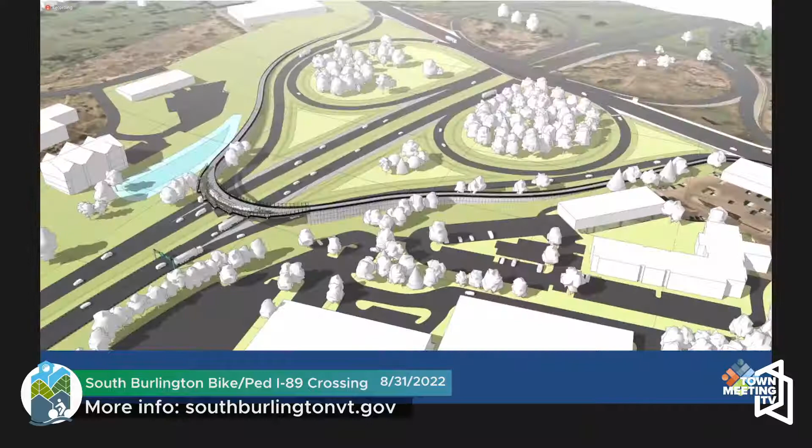On the land bridge, we're looking at what you were saying about wanting something green, something wide, something very natural. Here we focus very much on the user's perspective. That's the main focus: what if we give you a way, a place where you can go through it beautifully with a lot of nature, not just on the pathway, but also on the bridge itself.

So here, what we did was try to give you as wide a space as possible. In the middle, it goes wider, around 35 feet, but then we went even a step further by figuring out what if we create this jagged edge, more like a sawtooth, so in a way you steal even more room. What we came up with is one area for a shared space between pedestrian and bicycle, and another area that's more for respite, with planting and places to sit.

And yeah, so you can see this. Actually, for all of the bridges, let me go back, we want to make sure that even though we focus on one thing, the bridge looks nice both from the people using it and from the highway. We want to make sure they are safe and easy to navigate, meaning for people with mobility issues or other needs, it's gradual enough that you can use it, while also providing places to stop, places of respite.

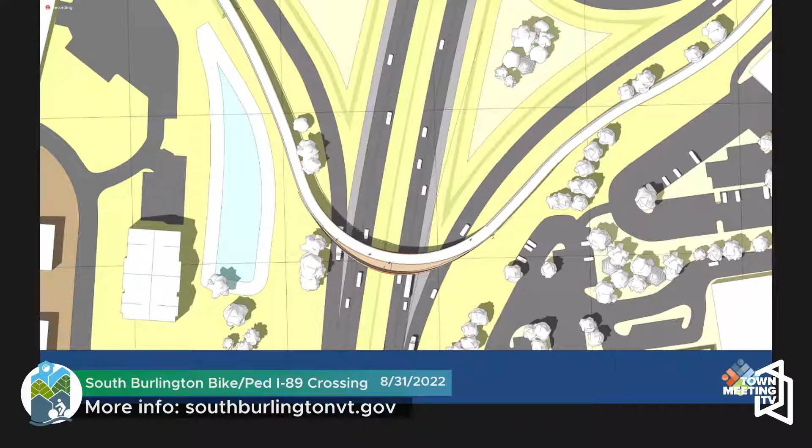And so the last one is the modern bridge. Some people were looking for something like a new thing, and there's this place where there's a university, there's science, something that is cutting edge. So we did this, a little bit similar to the land bridge, but instead of being transparent, we start to play with the idea of enclosure. What if you turn your back to the highway and create this cocoon, so when you're going through it, you feel like you're inside something, really protected. We're not married to the orange, though I like the orange. What we want here is to create more like a sculpture.

One of the other ideas is to take the mountains in Vermont, and that's what we have — a whole sculpture with a splash of color. So when you imagine going through the highway where everything has a lot of monotony, you suddenly get jolted by this form that crosses the highway, the horizon, with a splash of color. I think that will create a statement where it marks the entrance to South Burlington. So that's where we truly push that idea.

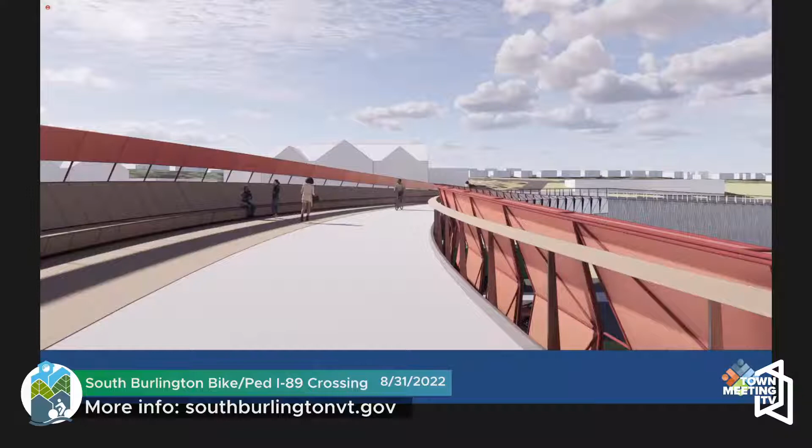What if we do a statement kind of bridge? Here again we make it wider, not as wide as the land bridge. We have the pathways — basically not separated, but they can change material and color. So on one side you have an area where you can sit and have a respite, and on the other side, with another color, you have the shared space for both pedestrian and bicycle. We also play around with the folds, because everything on the other ones was very open and transparent. This one we went the opposite way, very much enclosed, but then we start to think about different openings and patterns. So you see the whole bridge more like an object instead of in pieces. That's a way for us to really take ideas and bring them to the end, really push the boundaries.

And this is the last one, which is the modern bridge. Now, I personally like all of them, so I'm happy that I'm going to get opinions from everybody and I don't have to choose — that's a good thing. So here, when you're going through the highway, you get to see this thing, and I hope we are going to have a color for this.

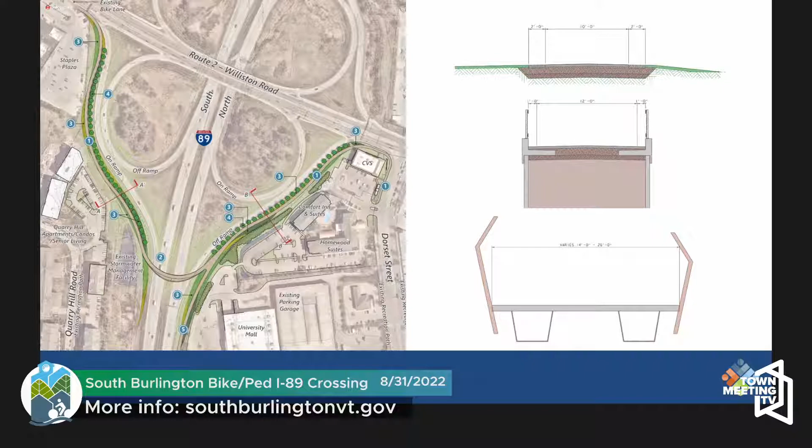I'd love to hear from the architectural team about winter, and which of the concepts - perhaps all of them - what can we do to make it as inviting for people to cross in the winter when it's very cold and windy? Yeah, that's a great question. The question is about wintertime and maintenance, and how are we ensuring that the bridge is also welcoming for use in the wintertime. This is also partially a question for Tom, as the head of Public Works.

Our team has been in discussion with the Public Works Department about ongoing maintenance needs for the bridge. Part of the discussion is that without knowing the bridge that's going to be designed and constructed yet, it's hard to put together the entire maintenance plan. So some of it is going to be working with our team on what that maintenance plan looks like and what the requirements will be for clearing snow and expectations. This will all be recorded in a plan by the city, but some of it is still to be developed.

I actually meant that from an architectural, conceptual perspective - which concept presents the most warmth and literally a wind break from the designs, not just the landscape. Yeah, Eddie, do you want to talk about that? As Eddie's walking up here, I would also say that would be a great comment to write down if that's something important, and stick it on the boards.

Great question - what do we do during the wintertime from the architectural perspective? The answer is something that we will work on, all three concepts, and we will be very conscious about making sure this is usable year round. At this point, the three concepts we have is just the big picture. Then things like security, accessibility, places to sit, what kind of area to sit, and how we can make this year round - that will be a guiding factor we will deal with and solve no matter which one we choose. So I hope that answered the question.

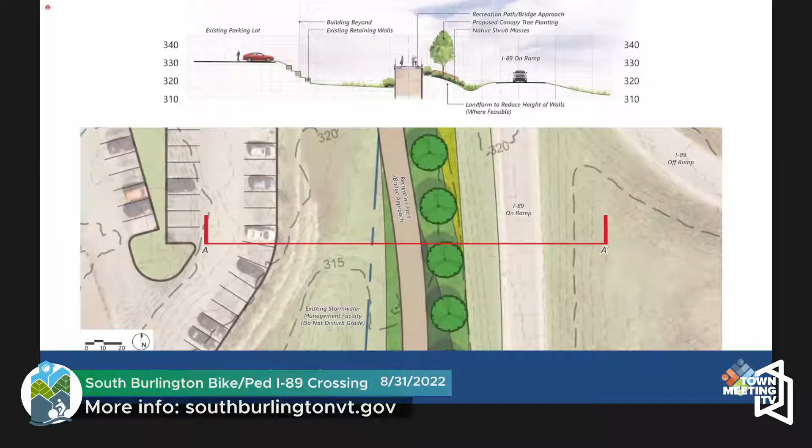Okay, let's move forward here. Mike and Mark were explaining the landscape architecture. This is the western pathway approach, and here's a zoomed in version of this section where we've got the Quarry Hill parking lot on the left. There's a space in between. This is all existing.

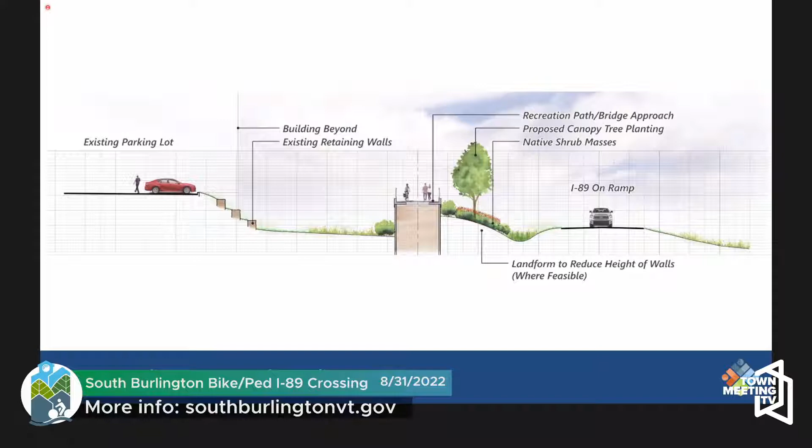The raised portion of the pathway, and then as we look further to the right, we have the I-89 on-ramp. So this landform is what Mike and Mark were talking about, as it starts to hide portions of that vertical retaining wall. Similar section on the eastern side, we've got the parking lot for Comfort Inn and Homewood Suites, the approach pathway, and then the interstate ramps. Again, a zoomed in version of the section—you can see the raised pathway, and again the landforms on either side to hide some of that vertical wall.

So I'm going to ask Tyler Vendatuli to come up. Tyler is a local artist who is also working with our team, and Tyler's got some hands-on art to share. I just want to emphasize a couple points about the art. We're looking at the art from two perspectives: one is the project itself as a piece of art—so the bridge, right? Maybe the modern bridge, as Eddie was talking about, could be an example of the bridge being a piece of art itself. The other perspective is art installations as part of the project. Both of those are elements we're looking at as a team, and we'd like to achieve both of them. So I'm going to hand it off to Tyler.

Can I stand over there? Yeah, great. Hi, I'm Tyler.

Tonight I brought these—I call them chunks. They're meant as a chunk of the larger piece of the project, and they're meant more to make you imagine things than to be examples for any particular bridge. I've actually got pictures of them too. So there are opportunities in the bridge to have cutaway panels. These could go between the members of the bridge so that as you're moving along the bike path, you get the projections of the leaves on it. And as you drive along the highway, you see this dappled surface instead of just plain sheets or a regular pattern. So there are opportunities for paneling.

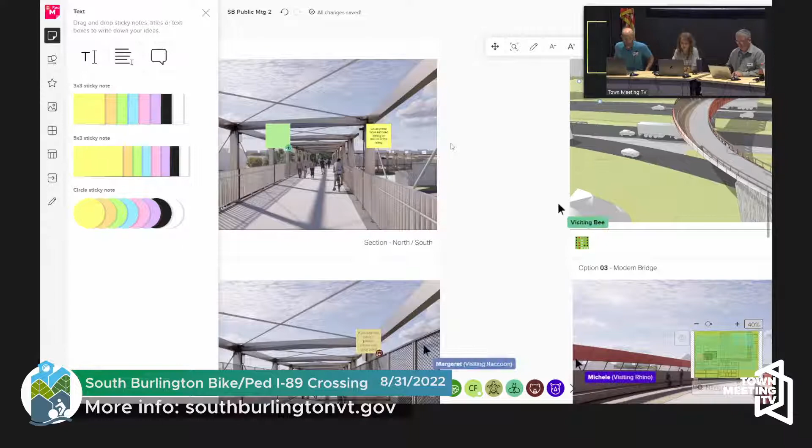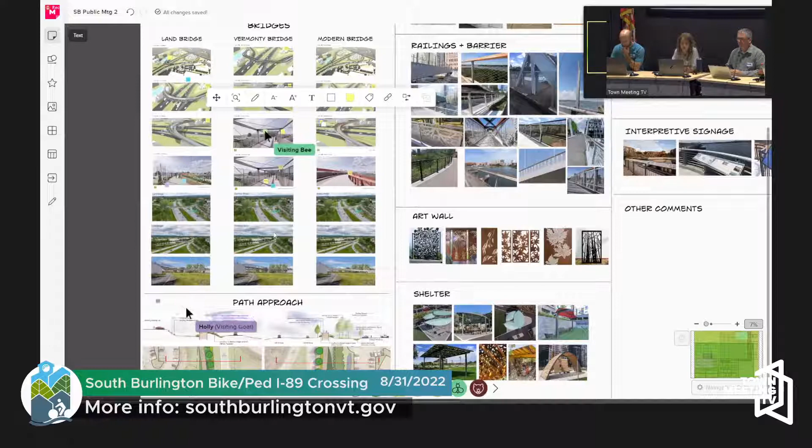It could be on a picture of the bridge or a picture of some of the art or some of the example walls. This is really your opportunity to share your thoughts, pros and cons about different concepts. So if anybody has any questions or just doesn't feel comfortable using the mural, feel free to also just unmute yourself and make that comment as well, and Sierra and Wayne and I will help place that comment on the board. This is also just a pure platform for open discussion about this, and feel free to ask questions. It doesn't have to be just writing down comments or telling us comments. Feel free to ask whatever, participate in discussion back and forth. Any feedback here is welcome.

I'm going to keep this mostly zoomed out, but if anybody has a topic they want to talk about, we'll be able to zoom in so everybody can see on the screen as well. So just let us know what you'd like to see, or feel free to just add your Post-it notes.

You can always guide some discussion. And just to let everyone know, I shared it in the chat, but you do have the ability to use the raise hand feature. It's hidden under the reactions button inside Zoom, but feel free to raise your hand. We can take you off mute. You can ask a question, share a comment, or anything like that.

I'm seeing a lot of Post-its get added, so this is great. Oh yeah, good idea.

All right, I see we have a hand up. So, yep, Chris, please go ahead and share your comment or question.

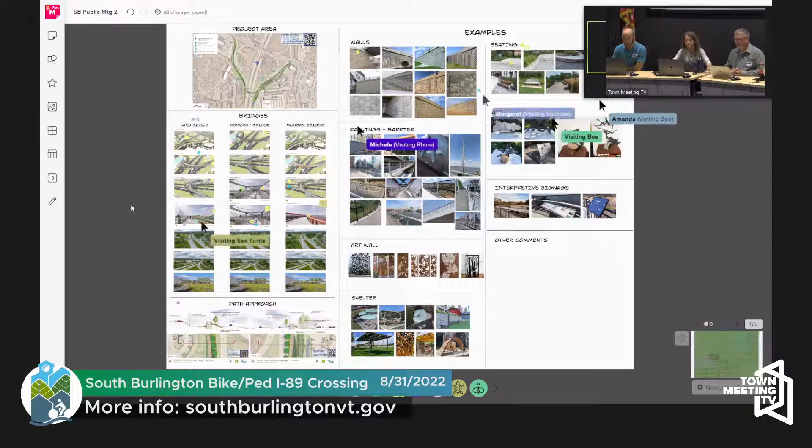Thanks. Yeah, on the land bridge, I was listening on a phone when it was shown originally, so is that—I see there's a person walking kind of on the right, and I see people sitting on a bench on the left. Was there one part that was for cycling, one for walking, or is it like one way direction, or how does that work? I think the intent there is to separate the folks that are using the bridge to just get across, like the bikes and the pedestrians using the crossing, and to create a divide using plantings and seats to allow people a space to kind of maybe go slower or to sit on the benches and be out of the pedestrian and vehicle traffic. They're not necessarily two lanes that are one way. It's kind of a different purpose.

Okay, thanks. Just in the image of the people sitting on the bench, there's a person walking on that right-hand side, so I'm envisioning that's probably cyclists or something like that, and not pedestrians on that side. I think it's just coincidental in terms of the way the people are shown utilizing the bridge. Okay, cool. Thank you.

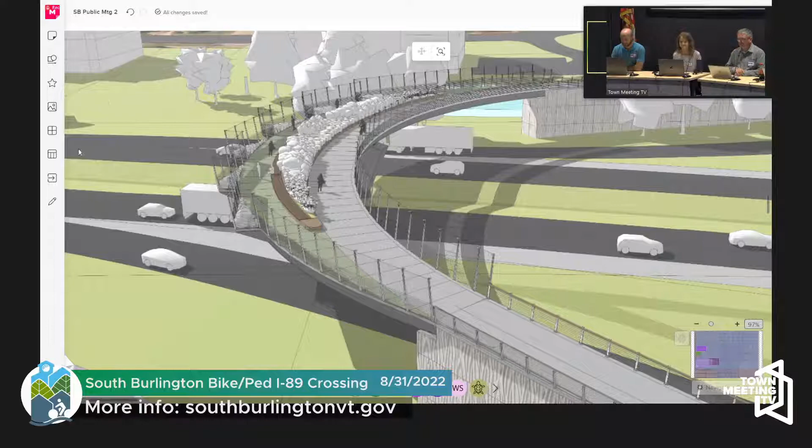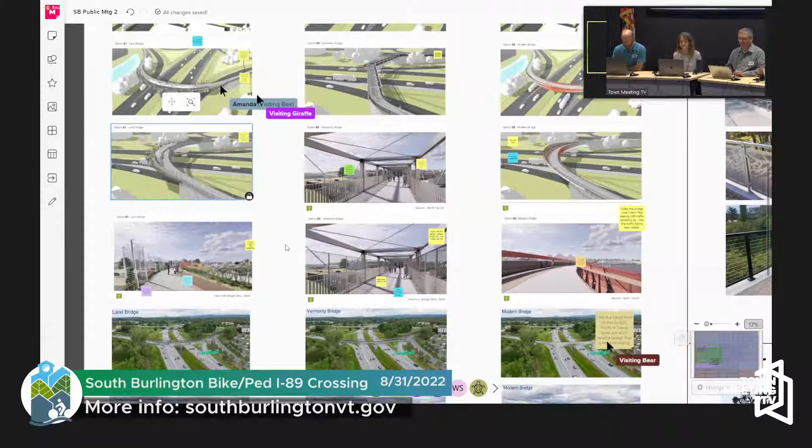All right, Chris broke the ice. There's got to be more questions in the crowd. Thank you, Chris. And we certainly, if anybody has any comments that they want to share with others, certainly we appreciate all the sticky notes, and those were definitely recorded and will be used. But if anybody wants to share any, we can certainly take those.

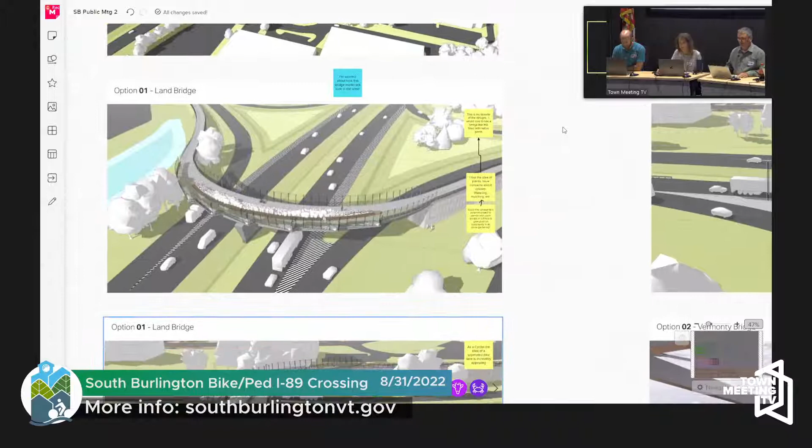All right, we got another hand raised. Is it Avila? Yes, it's Havila. Thank you. Great, you're welcome.

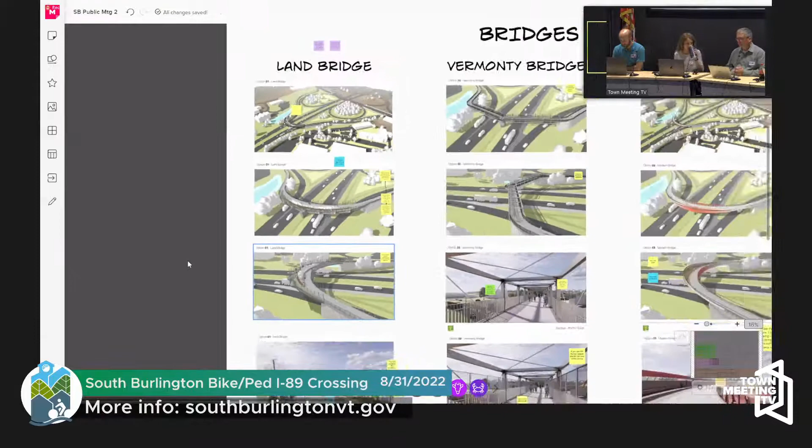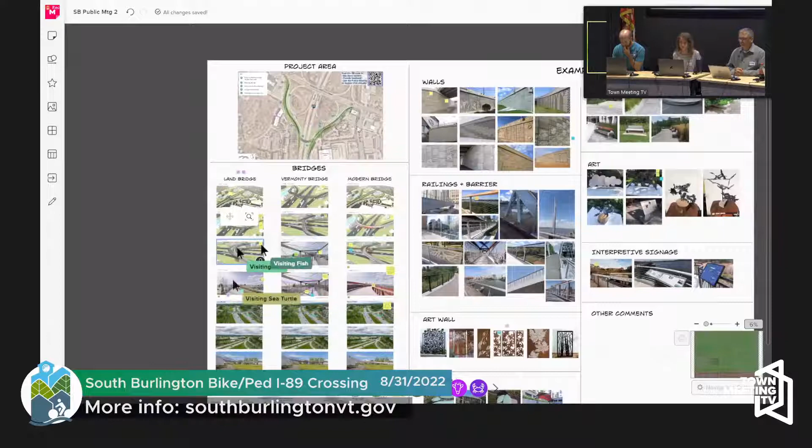I guess I am the current chair of the Bike Ped Committee. I don't speak on behalf of the committee, but I will say that we frequently entertain complaints from pedestrians about bikes whizzing by, and especially on Market Street, which is a shared use path. The markings are not clear that it is shared use, and the pedestrians are really annoyed when the bikes whiz by them. Even though it's a pretty wide space, what we've found that is really necessary is some kind of demarcation on the surface.

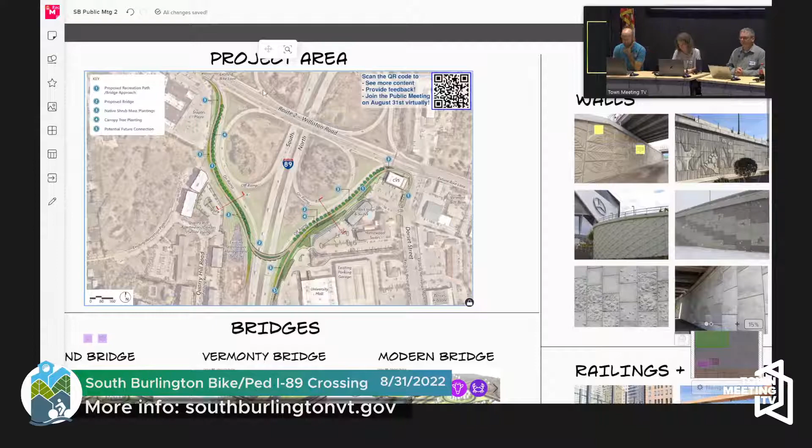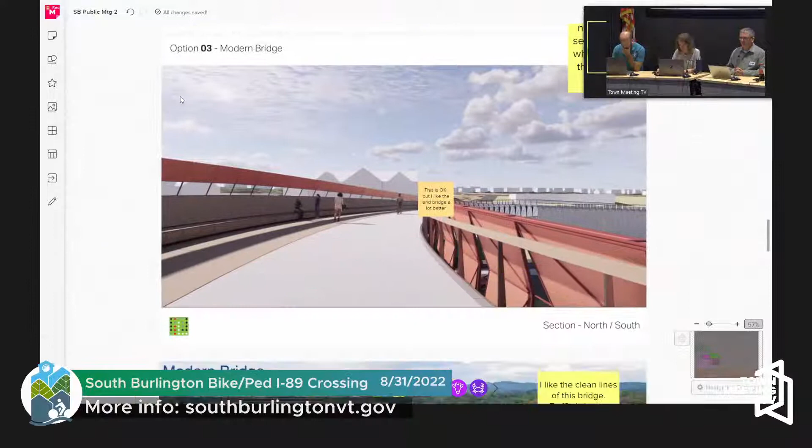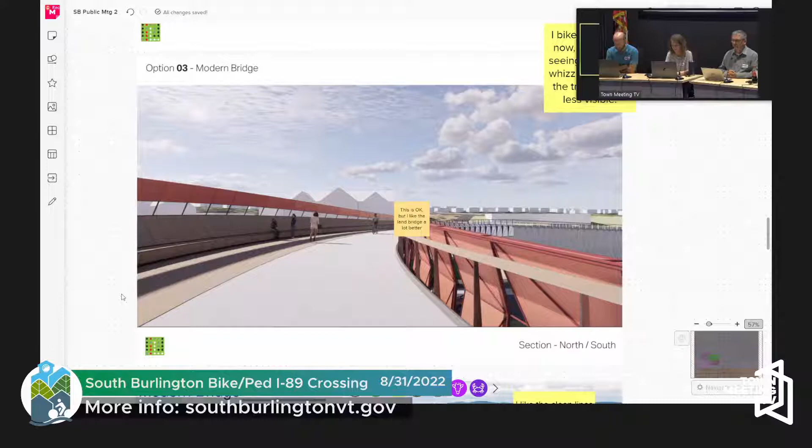I love the idea of having the different kind of color coding. Listening to the presentation, it sounded like it was color coded for people that were more in an area of respite, maybe sitting or standing and looking, versus people actively using the path. I'd really advocate for 3 zones: a bike zone, a pedestrian zone, and a respite zone, depending on the final concept. We entertain complaints from the public all the time, so I'd prefer that and would make that comment. It doesn't matter which bridge concept you end on, that would be a key feature in my mind.

Yeah, it sounds like an applicable concept to all 3 of these themes - the more or different visibility separation for those 3 different user groups.

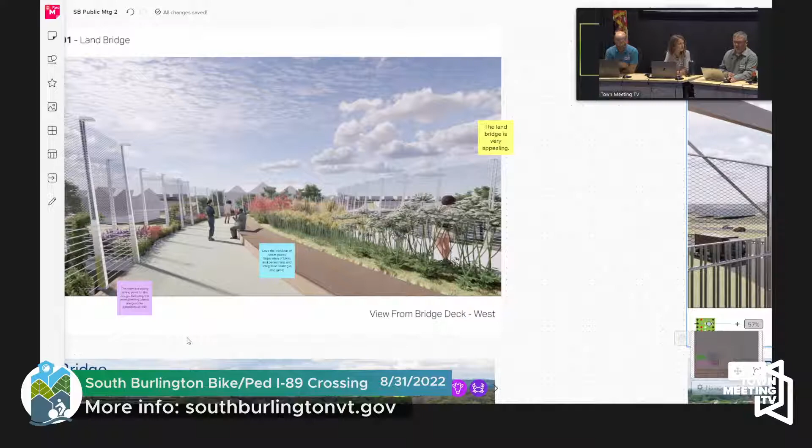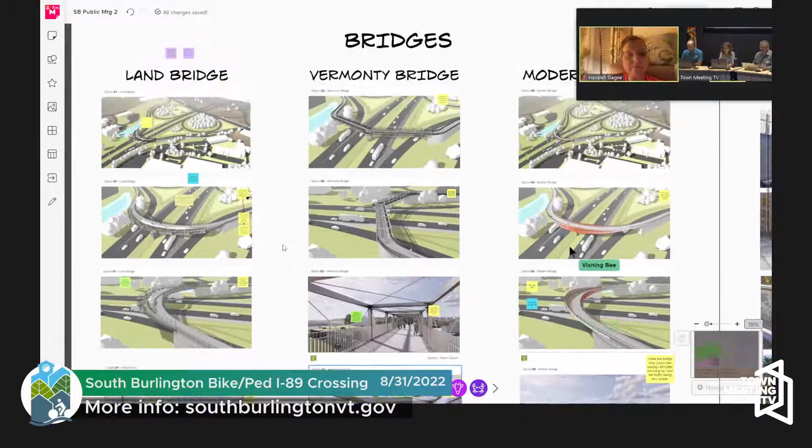Great, thank you. I did have a question to follow up on that comment. Do you think the geometry of any of the options, not just the width, could also address that? Is your experience that these complaints come from areas that are really straight, where a bicyclist can get a lot of speed? I'm wondering if there's anything in the different options that could address that concern a little better.

I can't think of a structural thing, but I love structural solutions. I think in my mind it's demarcation - either color or subtle texture differences that can actually help. Texture differences will help you slow down because it's less pleasant to walk or bike on, but they have to be subtle, because there's a point where it's not really fun to walk on it either. That might be one way to consider it if you're not color coding.

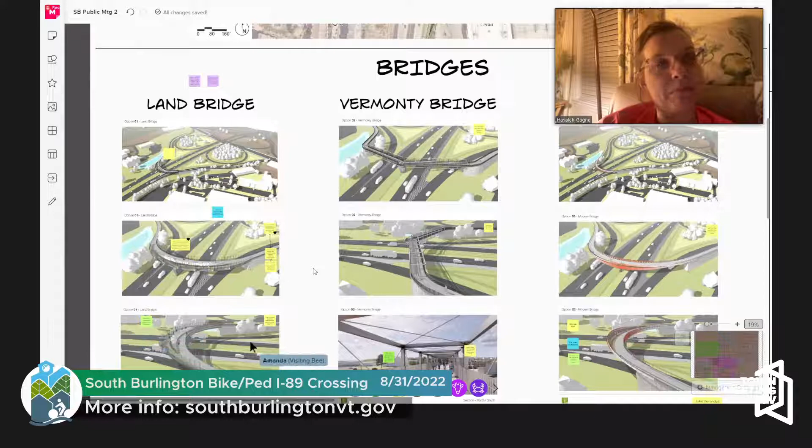I have to think about that, but were you thinking of some other version of it? I was just thinking along the lines of what was discussed about the approaches being sinuous and having some vertical elevation - whether you think that will be a natural traffic calming for speeds or not. I'm curious where your complaints are coming from in the past - are you seeing any common traits in the areas where you're having those conflicts?

I have a feeling it might not matter, only because e-bikes and motorized scooters are being used more and more, and elevation isn't much of an issue when you ride a pedal assist e-bike. You can whiz up a hill easily at 20 miles an hour if you're not thoughtful about how you're sharing the path. That's part of it - you want people to commute and use a pedal assist e-bike. It's a great commuting bike, but people have to be considerate, and you have to share and structure things so everyone has their place, which helps people share.

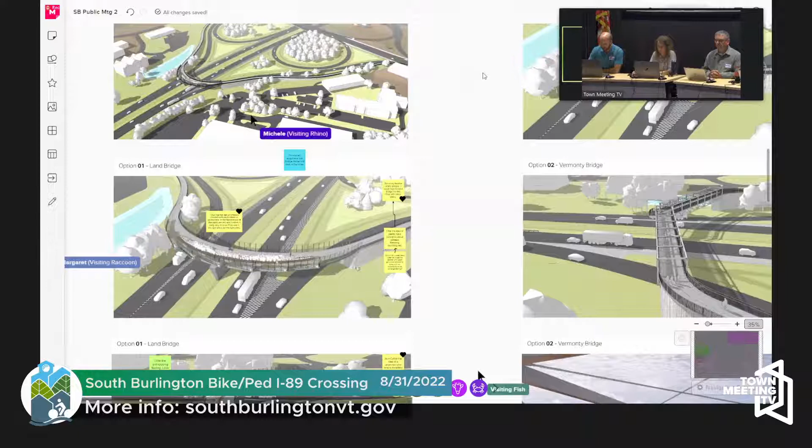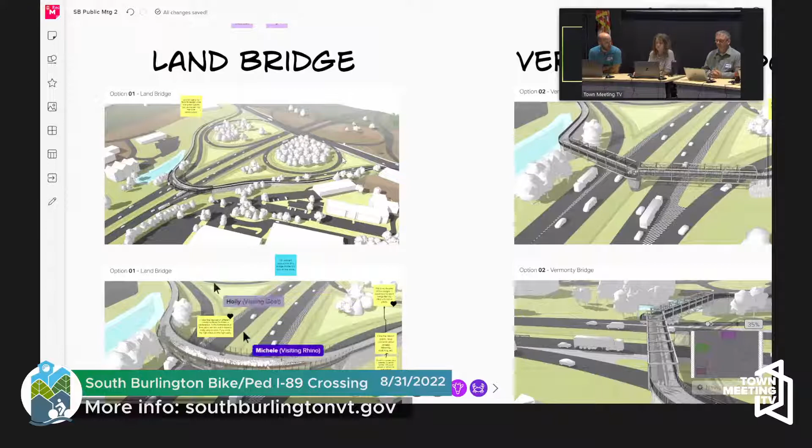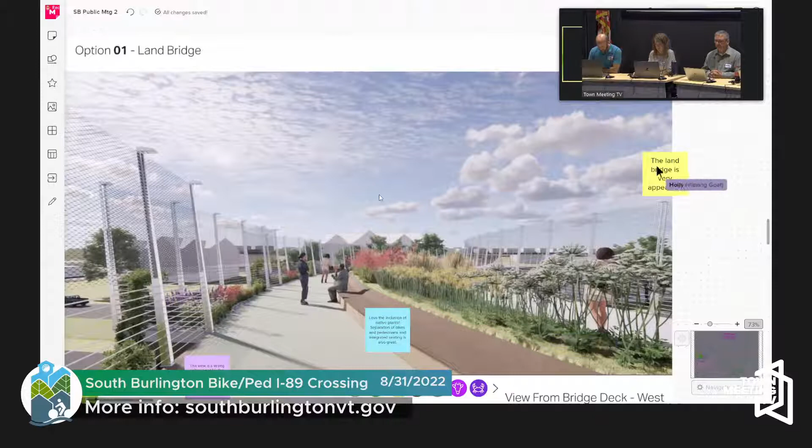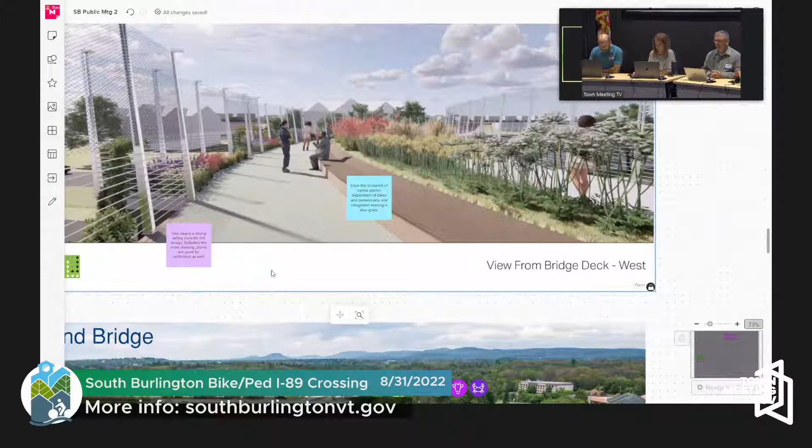The land bridge shows a lot of curvature, that separated space for the respite area you mentioned, Wayne, natural plantings, and some of this sawtooth jagged fence in front here. Let's try to zoom in a bit so everyone online can follow. Loving the mesh, the native plants, separating bikes and pedestrians - a lot of positive comments here. Plants and pollinators - it seems like a lot of the comments are geared towards the user experience rather than the driver experience on the interstate.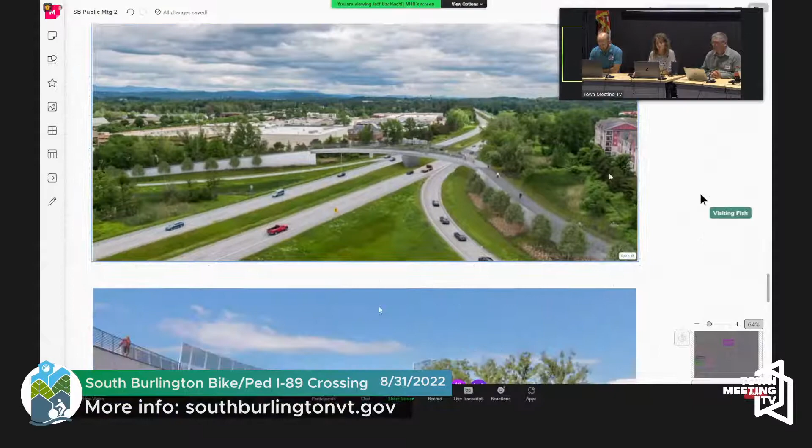How do we think a land bridge looks from the interstate? Any thoughts on that? It's definitely an interesting view. Where's the photorealistic one? Yeah, here it is, I'll zoom in on this a bit - you can see those sawtooth edges in the front coming from the south.

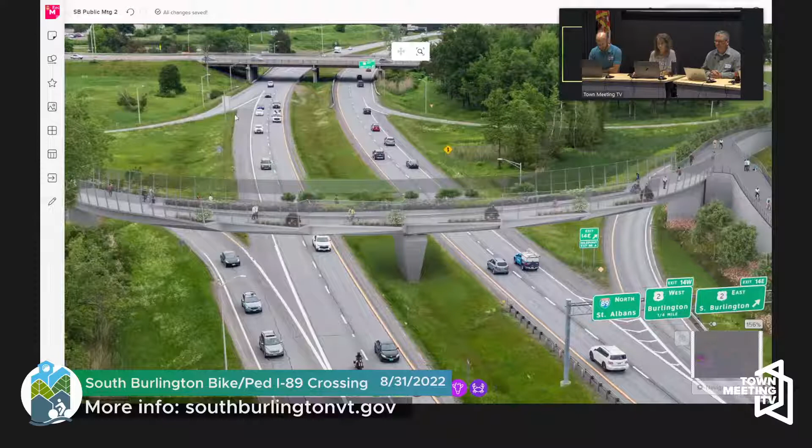Thanks, it's me, Havalah, again. I think I just prefer this to writing sticky notes. I like the look of it, and I love the greenery.

I kind of wonder with the sawtooth, if those sawtooth areas are a natural place to put areas of respite, because it's a little bit off the rest of the path.

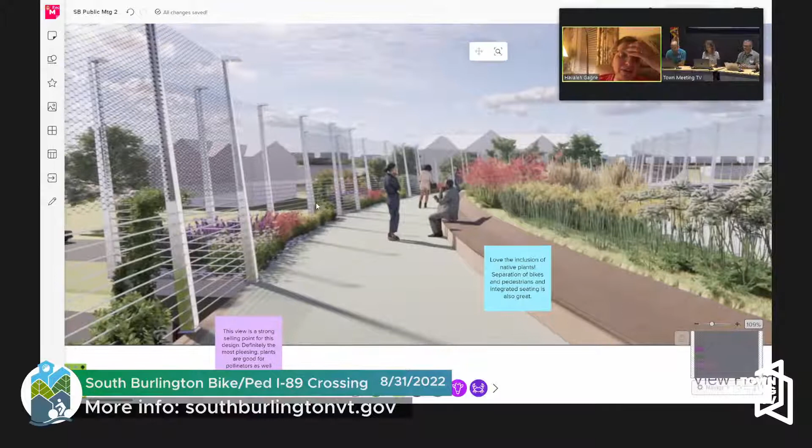So I do like the look of it. The one question, and I love the idea of the greenery, I'm just wondering what the maintenance is going to look like. How are they going to get watered? And the other part is that's a bridge and it's really cold, so I think you're going to only be able to put annuals instead of perennials in as a gardener. I'm wondering about maintenance costs, because that's a big area to landscape over and over. I can't imagine there's many things that are going to overwinter well when it's -30, and I'm pretty sure the roots are going to get -30. They're not going to be that protected by soil if it's all air around them underneath.

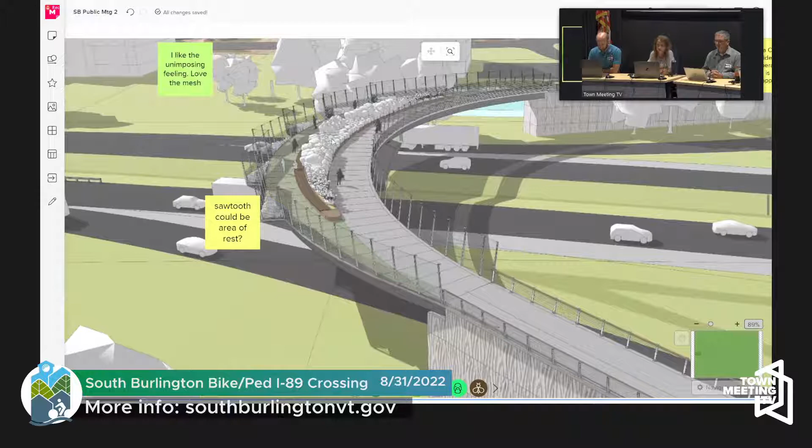This is definitely an ongoing conversation we've already been having with the city on maintenance. This has been brought up before, the concern with maintaining the plants, watering, and who's going to do the maintenance. The city is going to take on most of the maintenance efforts here, so they are the ones bringing up those same concerns. It's all being talked about and worked through, but yeah, those are very valid concerns.

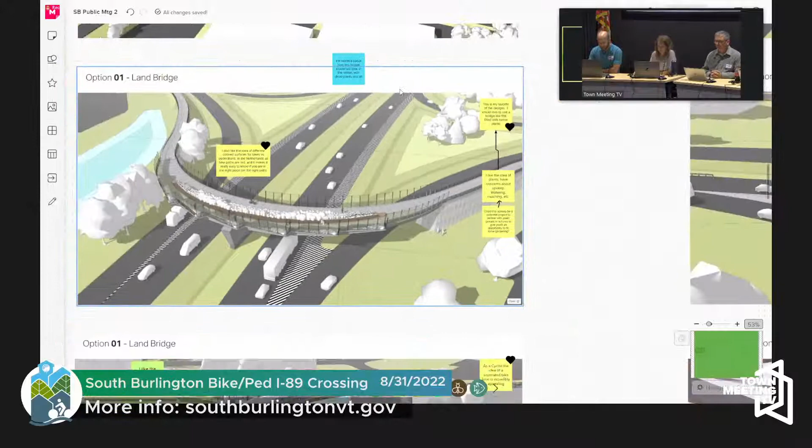Yeah, this is really good feedback. Excellent use of the tool.

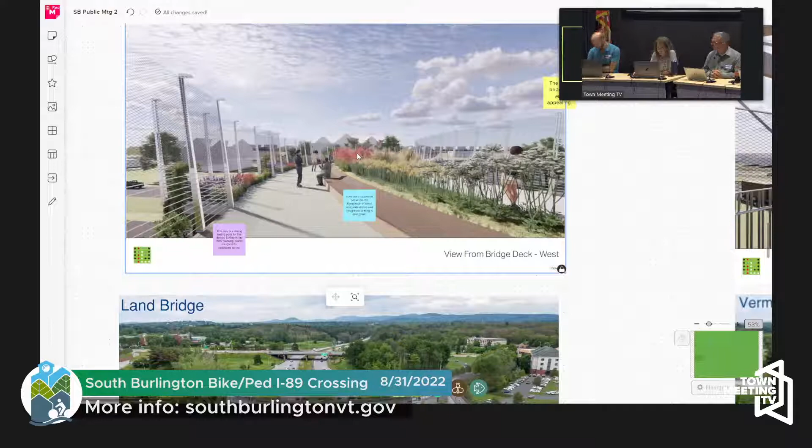Cool, so should we focus perhaps on the next concept? We don't have too much time here, so I want to make sure we have enough time for everybody. I think we should jump to the Vermonty Bridge.

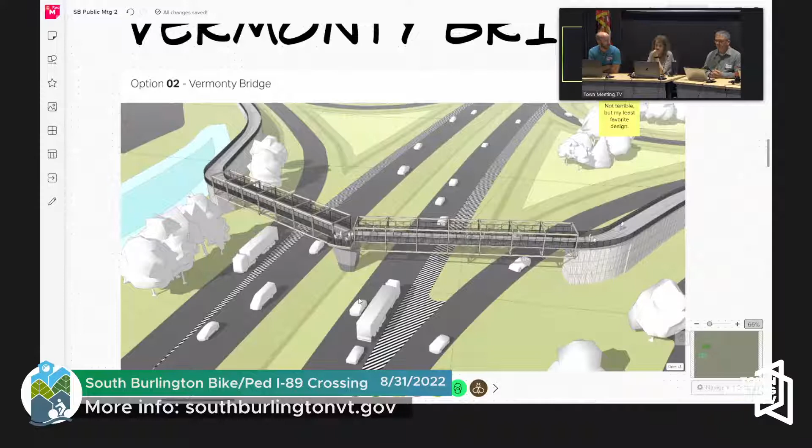Let's jump to Vermonty Bridge. This is our linear span looking bridge, so we've got two linear spans, less curvature in this one, with the truss structure around the outside, sort of resembling an enclosure similar to a covered bridge — that was some of the design intent here.

Let's look at some of these other images and any other thoughts people have. Fails to look traditional, much prefer the other two designs. Did not expect this design from the written description. So more enclosure would be preferred on this option.

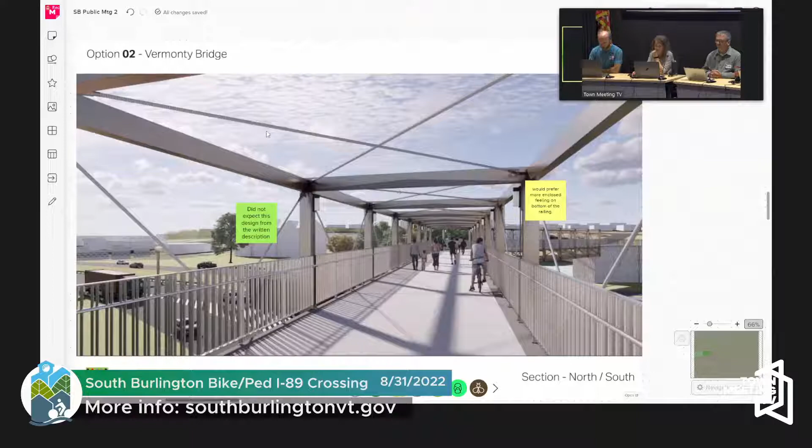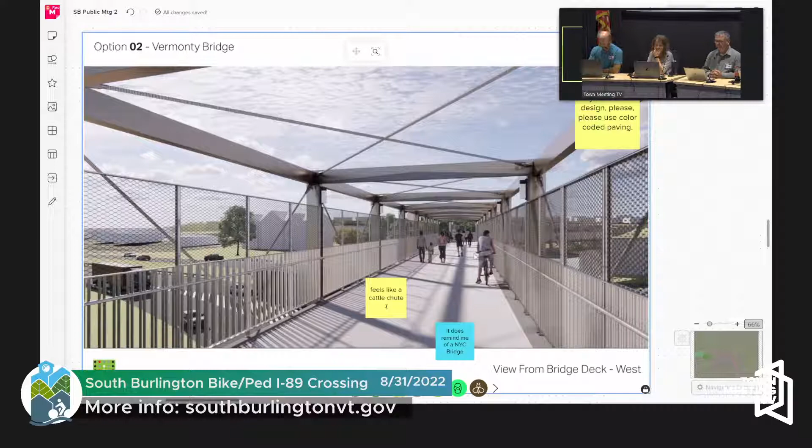Color-coded paving here, similar comment to the last one — again, kind of similar to all three concepts, trying to separate those bicycles and pedestrians a bit more. Feels like a cattle chute. Traditional. Remind me of a New York City bridge.

This is a photorealistic image. I always like these — I think it gives us a nice perspective into what this will look like in the real world.

Image from the ground. All right, please do share what you do's and don'ts are about the Vermonty Bridge. Perhaps just less opinion on this one.

All right, yeah, we can move on. I'll jump on to the next one. Let's look at the modern bridge.

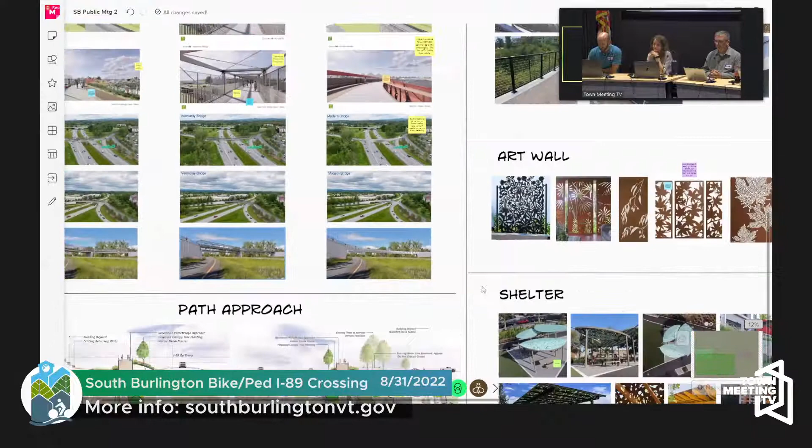There's actually a lot more to talk about here, we got all kinds of project elements. How are we doing on time? Got a good 15, we've got about 15 minutes. Yeah, good, all right, let's go through the modern bridge. What do we got here?

I worry this bridge won't age well and will look dated quickly. Modern bridges can be a time capsule a bit.

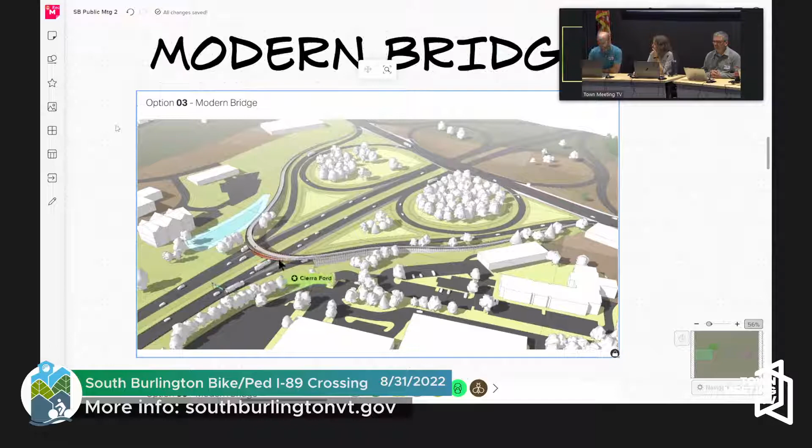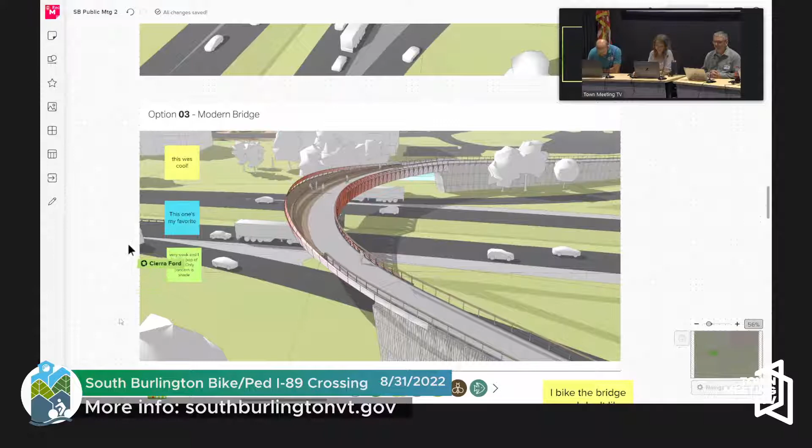I like how this looks, but prefer the land bridge — so positive, but not the favorite of this commenter. Oh, I wrote this one. This was cool, I think I just placed that one randomly. That might have been me, but I do think this one's cool. That's my opinion, this one's my favorite. That was not me. Very sleek, and I like the pop of color. Only concern is shade — true, less shade shown in this option, but I would also just keep an open mind here that some of the art that was talked about, some of these concepts can be kind of cross-pollinated a bit. I wonder also if the person that wrote that comment may want to elaborate a little bit.

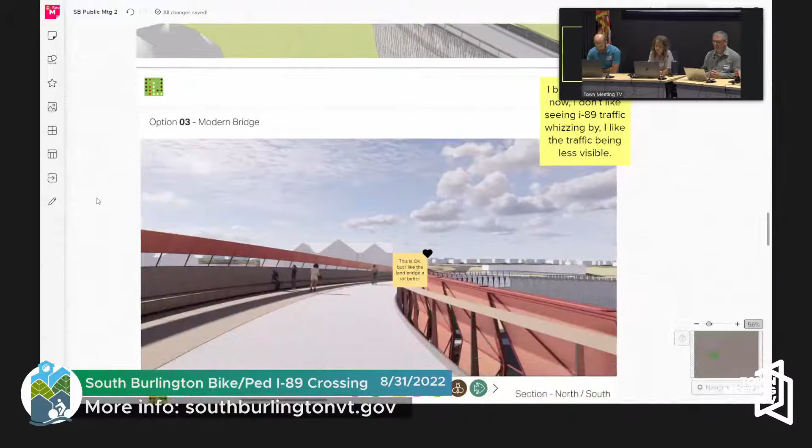Cool. All right, more images here. This is okay, but I like the land bridge better. I bike the bridge now. I don't like seeing I-89 traffic whizzing by. I like the traffic being less visible.

This comment is placed near the modern bridge. I assume the commenter is saying they like this option because the traffic is less visible - is that fair to say? There's a kind of a screen. I think that makes sense because this is the most screened version. Yeah, the others are very open. Feel free to correct us if we misinterpreted that, but I think I would agree this one is screened.

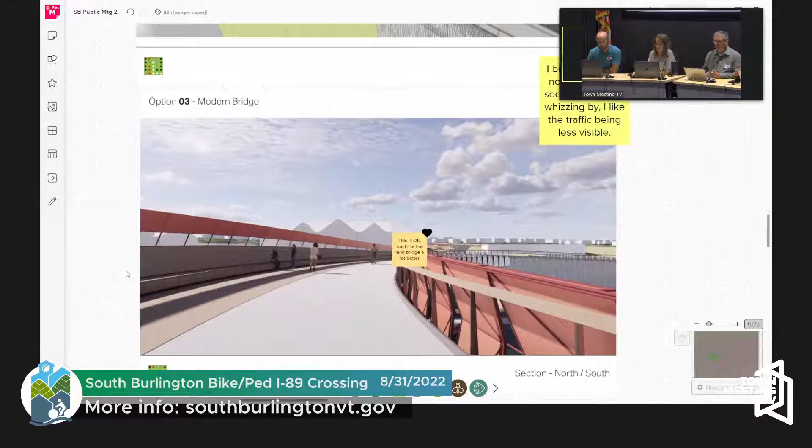Yeah, I think that was mine - I do like it a little more enclosed, I don't like all the traffic whizzing by. To be fair, I am afraid of heights, and I hate the heights. We talked about being inclusive, and there are other people besides me who are afraid of heights, and being able to visually not look at all the traffic 20 feet below is comforting. But I can totally understand wanting to see some of the view and some of the other things, so a full wall or chute feeling is probably not pleasing for everyone either.

Yeah, fair point about heights - you won't be alone in being afraid of heights.

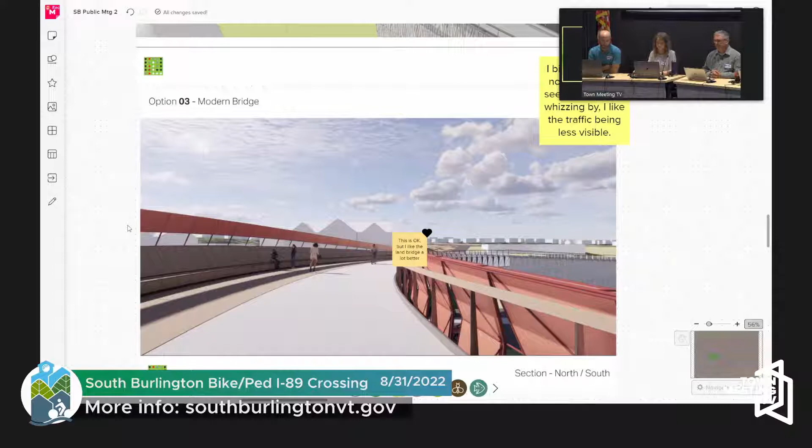I like the clean lines of this bridge. Traffic is heavy here, we don't need a bridge that is too interesting. So, clean, kind of preferential to the minimalist design - simple, clean, not too many things to see. Not being able to see as much traffic below is comforting in this option. Probably looks the nicest from the highway of the three - that's a perspective from the driver, best looking for the driver according to this person.

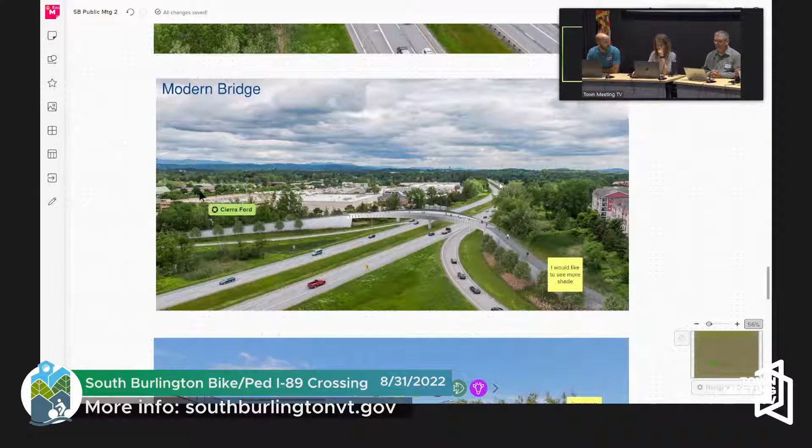I would like to see more shade. It's maybe the same comment, or perhaps somebody else saying the same thing - or the opposite of what you thought, Wayne, right? Yeah, this is much clearer for sure.

Great place to add the art to the sides with cutout leaves and shapes. So this option has some opportunity to add cutout shapes in the art. Definitely does - that's good feedback.

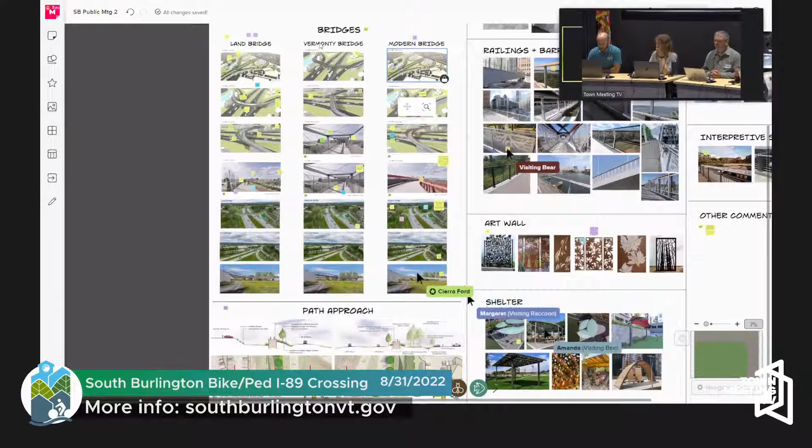Cool, so we talked a bit about the 3 different concept bridges. There's some other concepts that we want to give everyone an opportunity to comment on, so I'll just browse around here and see what we find.

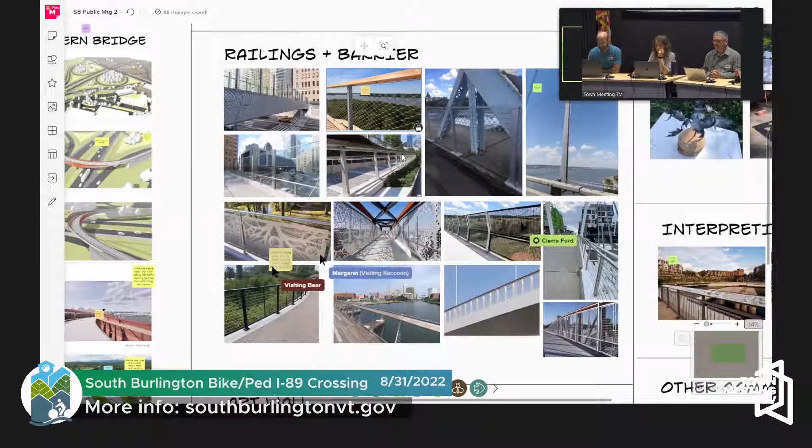Well, I'd love to talk about the railing. Sure, and highlight that it's going to be a really important feature. I'm interested in some input on what people really value in the railing, if there are any comments or questions - let's look at some of these here.

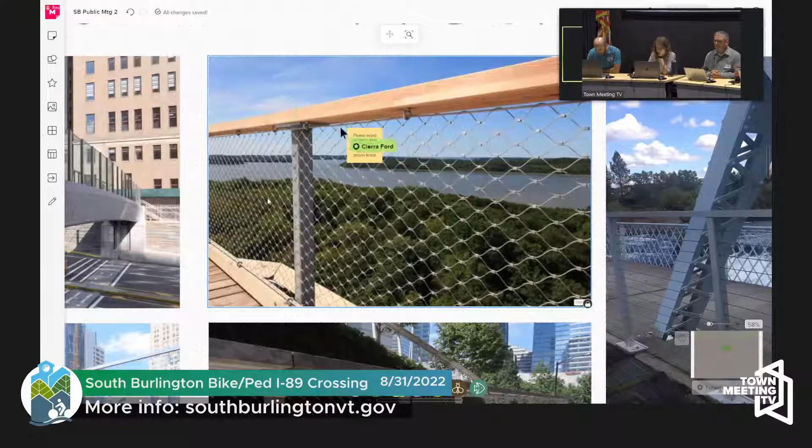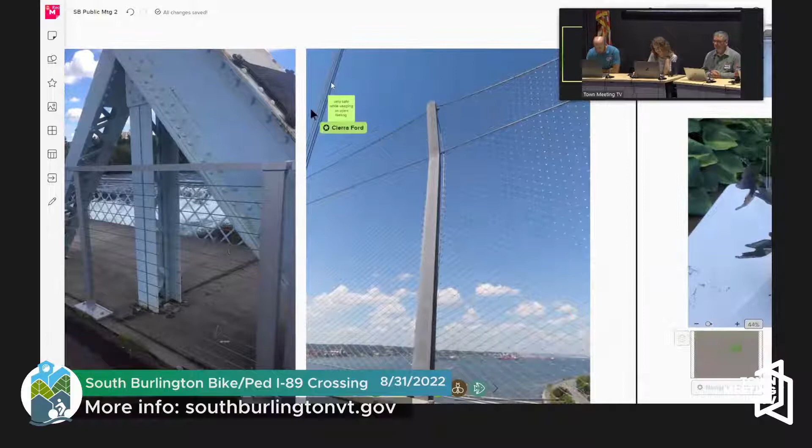So we've got this - what is this, like a mesh railing with a wooden top plate? Please avoid anything that looks too much like a chain link prison fence - that's a good comment. Over here we've got a similar mesh, very safe while keeping an open feeling, so some preference for an open feeling in this railing design.

I like this railing best. Shields traffic, but not too enclosed. Feeling just right. So this is the decorative railing. I thought we saw some cool art examples of how this could be incorporated into the bridge. I also would have folks think about what they like about the heights, because there are different examples of the heights of the railing. We heard from one person just a moment ago that if you're scared of heights, maybe you're more partial to the taller railing.

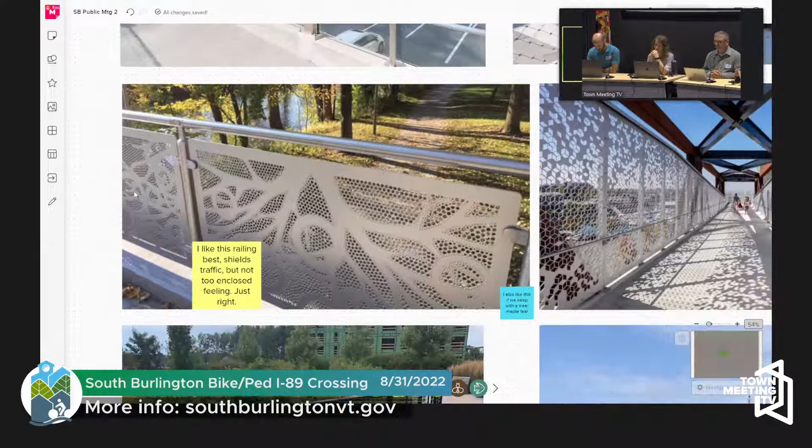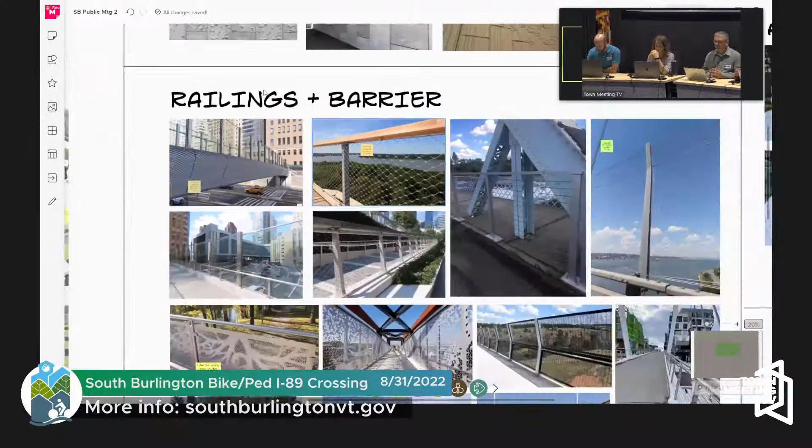I also like this if we keep with a tree/maple feel - the interpretive art or decorative art panels with maple feel. These are great. Here's a new one, I'll let them finish typing before we put them on the spot. A lot of different concepts here to look at and think about. Again, we want to stress these are things that can be combined with other concepts, not fixed to one concept necessarily.

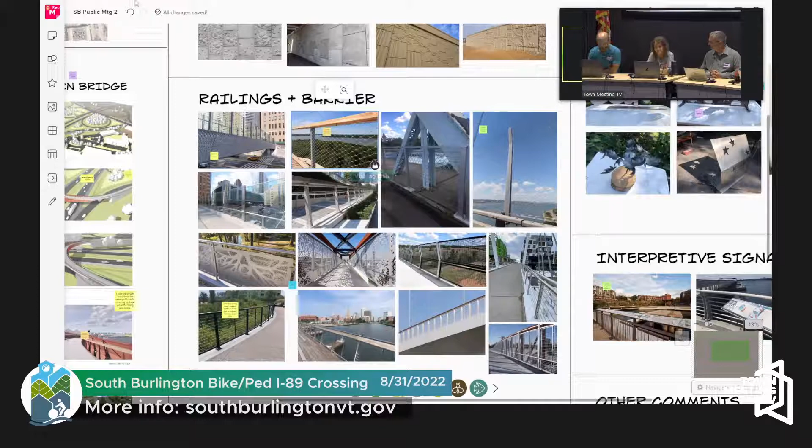So keep an open mind. But the railing is a very important safety feature, one that could add to needs to be there, so it's good to get some ideas around that. And yeah, definitely going to have a railing. Surprisingly, the minimum height for the railing is actually only 42 inches, which is pretty low if you think about walking or biking over a bridge. That is AASHTO standards - we would not put a railing that low, but it is curious because we do have a lot of railings here that show tall and short, not having to go the minimum or all the way up the sides, but where people feel comfortable.

And we have gotten some feedback so far, but I think the comments about winter and making the bridge inviting lend itself to a taller railing, right? And then wind barrier - this comment looks like this is a nice over traffic cuts the wind in the winter, and this is the open glass railing. We did also hear about the concern about winter use in the open session, so that's good. Well, you got a few more minutes, so if you want to put some comments in there about the rail, that'd be great.

Just want to call out something in the chat, I don't know if you guys saw it or not - about railing will have to make sense for snow, allowing it to melt and plowing, which I think is similar to what we were just mentioning. Yeah, absolutely. That is something the city has brought up, where we can, how they're going to maintain it in the winter, where the snow storage is going to be, and what types of vehicles they're going to need to put on the bridge to make this a year-round use bridge. And VTrans is unlikely to appreciate snow being pushed onto the interstate from above - not an option. So that is a concern, right? How are we going to deal with that?

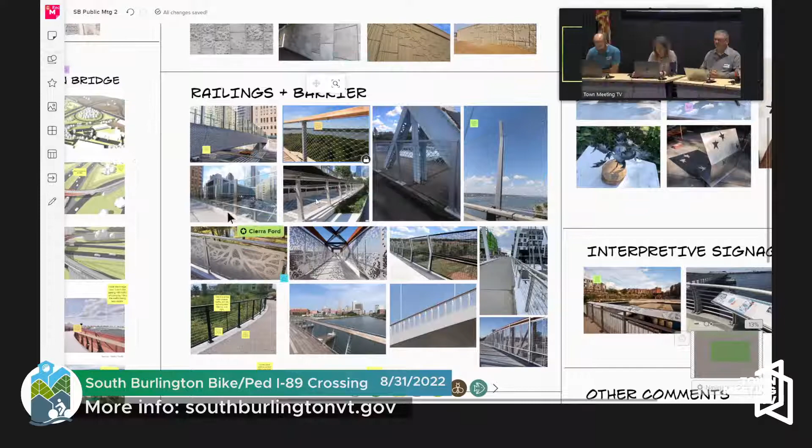Glass bridge, all right. I'm going to zoom back a bit here and see if we have any other content to digest as a group. So we talked about railings and barriers - how about we go up to walls? Is that worth looking at? Yeah, so walls are going to be an important component of this project as the pathway approaches the bridge span.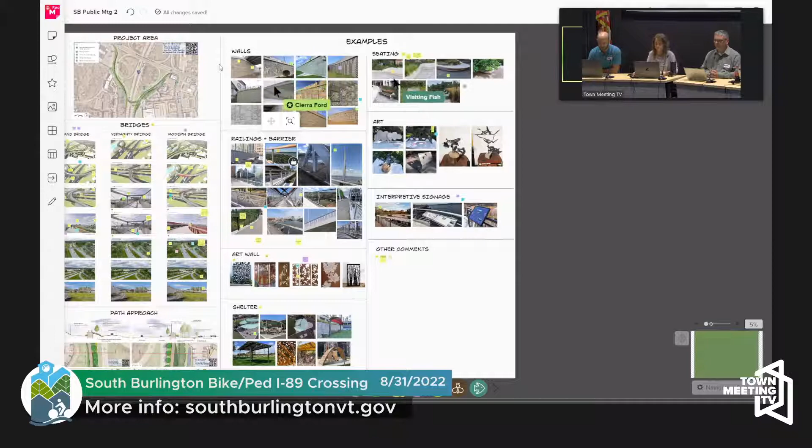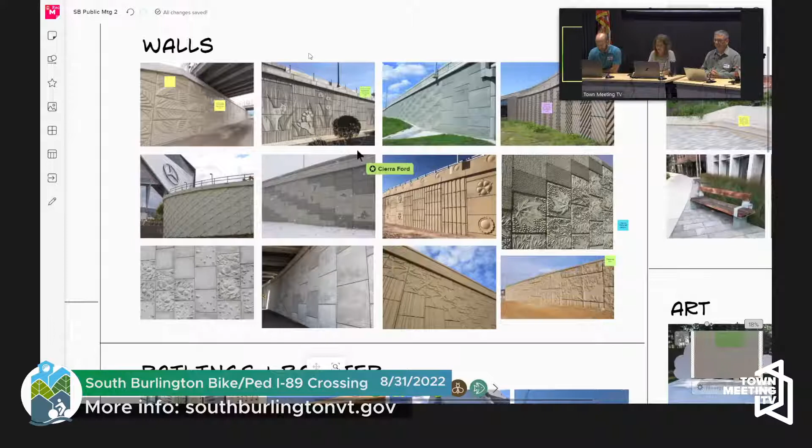We're not going to have bridge spans that don't go over the interstate, so the raised walkway to get up to that height is going to have some walls. The walls are an opportunity for lots of artistic and design opportunity, so your opinions on these walls and what they should look like are highly valuable - they'll be a prominent feature of the project. We've got some great samples here and already some comments coming in. Let's start here on the left - this one's got some leaf patterns. Thumbs up for art integrated into concrete walls. Yes, absolutely, a lot of opportunity there.

The flexibility for this type of wall system does lend itself to a lot of different creative patterns. Yeah, it's precast concrete, and the patterns are integrated into the forms, and they can be repeated over and over again, or as you can see in that middle frame, you can have a few different patterns that carry over between the different panels, but there's an awful lot of flexibility there in what could be done.

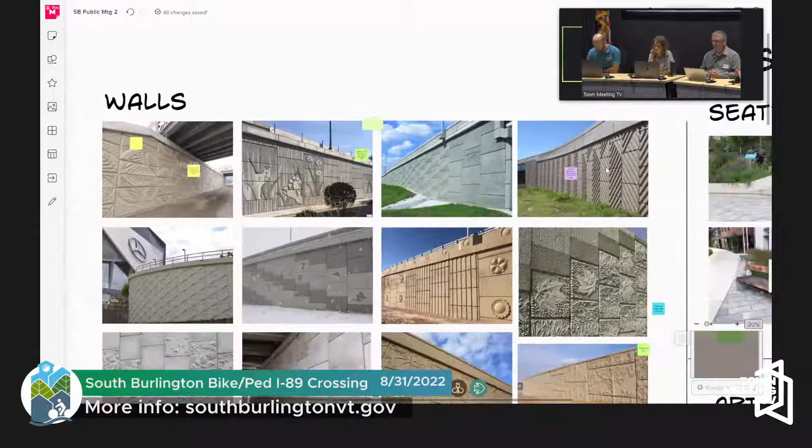This one looks similar to the flowers on the walls of Votey Hall UVM. Love the texture and light play this adds to the area. Yeah, so a lot of positive feedback here on walls. These are sick. Cool. I like the maple leaf designs.

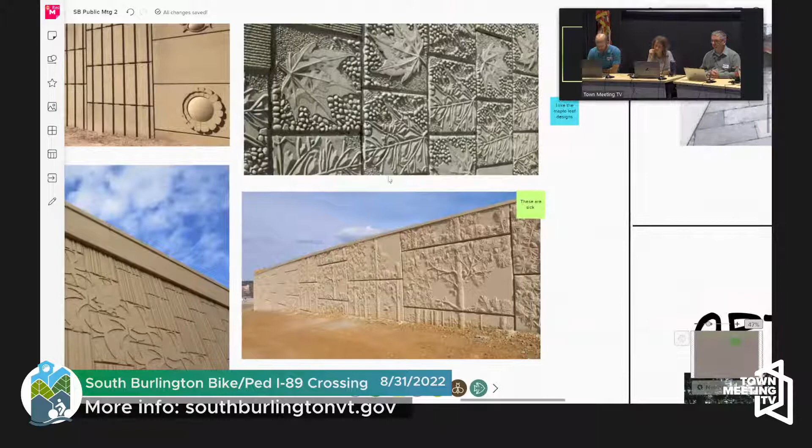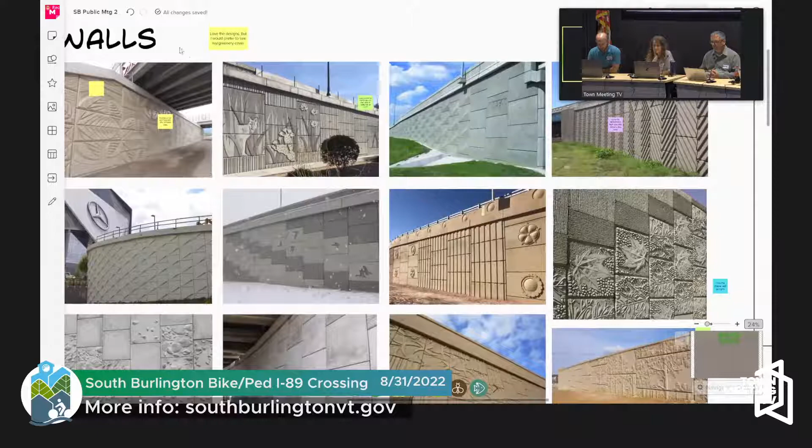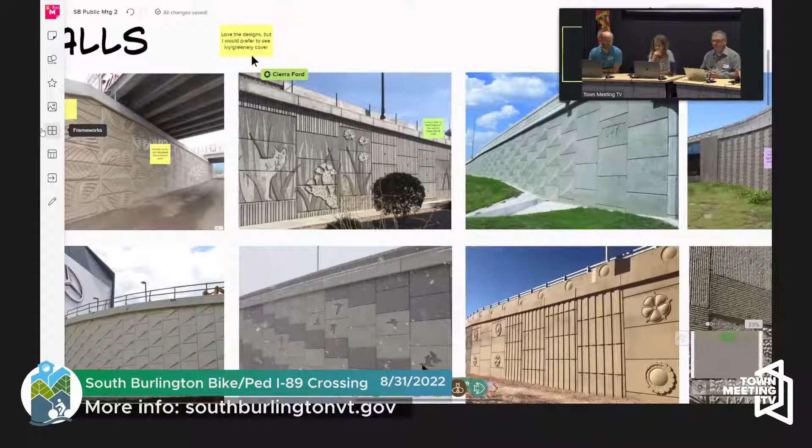I think what the crowd is saying is that they like more than just boring retaining walls. And this is really getting to the heart of the comment from Tyler about making the bridge art itself, kind of integrating it. So if anybody has any thoughts, we'd be happy to have you include those as well. There's a great comment here talking about a preferred ivy/greenery cover. So we have talked mostly about concrete wall panels, but maybe incorporating some more greenery into the design. That's a great comment.

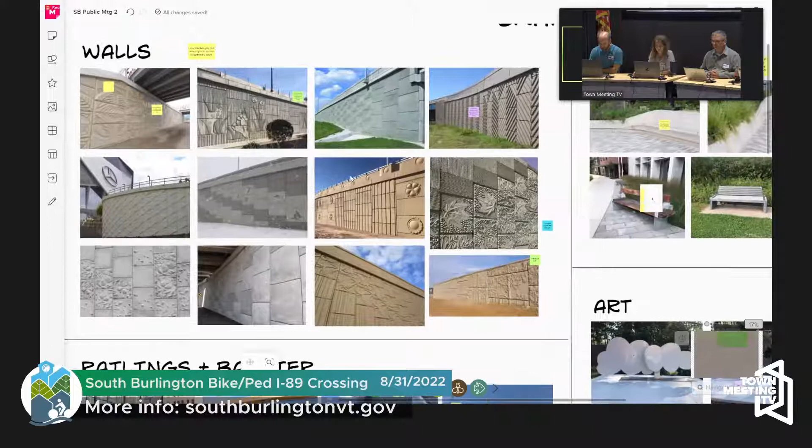You all are an active bunch. This is great, yeah, lots of comments. And know that, if I don't read your post-it, that doesn't mean it didn't get placed. So all these will be reviewed later. Mostly reading for the entertainment value for all of us here today.

We've got a little less than 5 minutes on this session before people start coming back into the room. Cierra, what's our next topic we should look at? Let's see where all the comments are. I see a lot in seating. And if there's something you'd want us to make sure that we cover, just raise your hand and say, can you go to some section, and we'd be glad to spend some time there.

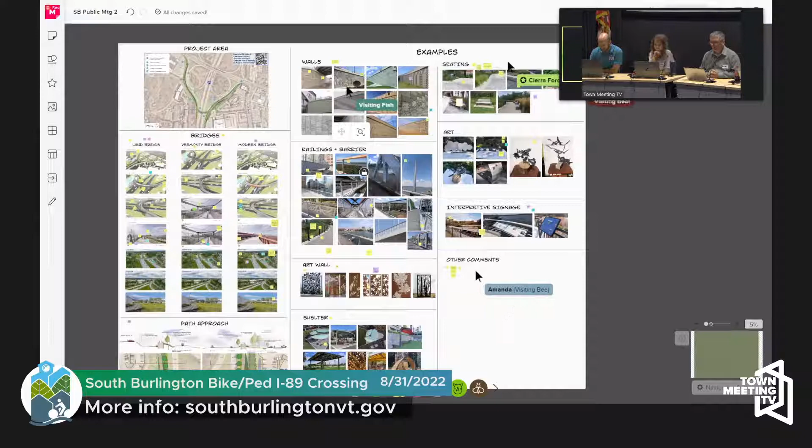Let's talk about seating real quick. So I see a lot of comments here. Having an accessible place to rest is a great idea, especially to support older adults. Yes, it's a long bridge, there's a lot of length to cover, so having seating is a great idea. Good to have a place for folks to rest.

Skeptical people won't want to spend much time around the noisy interstate. Perhaps the areas of respite should be located as far away from the interstate as possible. I would say there's consideration for respite areas on the approach pathways, right? There is on both the approach and on the bridge, and I think if you look on the land bridge, the respite bench is in the middle of the bridge, which may mute some of that, but I think that's still a good comment. Yeah, definitely considering the respite opportunities, not just directly over the interstate.

I like the clean lines, would look good with the modern bridge. Great, some other comments on some seating ideas. Due to road noise, maybe the seating should be limited to the approach areas. Yep, similar comment, good one. No one will probably be hanging out on this bridge, but there is a need for rest from an accessibility standpoint, so perhaps just a place to sit.

You're basically saying it's more of a functional consideration than aesthetic. A lot of seating without taking much space. They like this design right here, this sweeping bench. Great. Yeah, I heard some themes though, Wayne, of not necessarily needing to hang out over the interstate for long periods of time, just wanting places to sit, to rest. Some common comments. All right, cool.

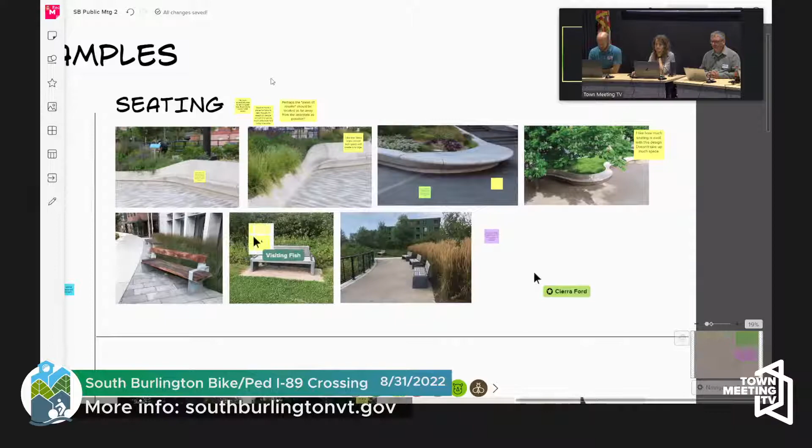Still a couple minutes. If anybody has anything they want to shout out loud or make me zoom to, I'm happy to zoom in. Got lots of other comments we could look over here.

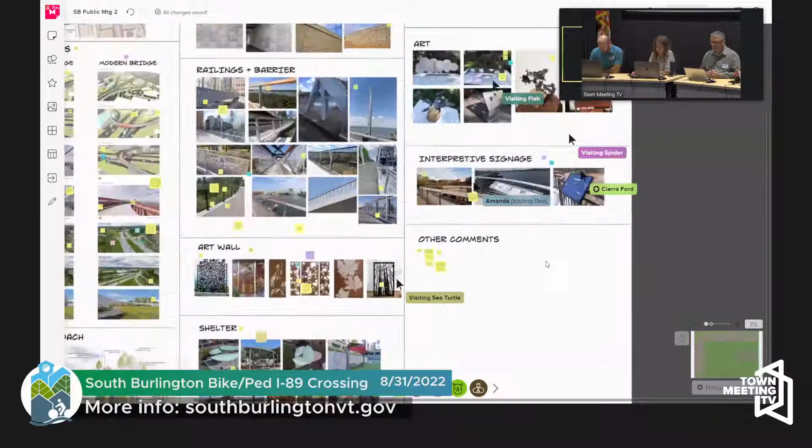Potentially, some thoughts about which users would use it, pedestrians versus bicycles. Discussion about connections. Will there be areas for bikes to be parked in the area? That's an interesting question. I don't know if I have an answer to that.

Have you guys talked about bike parking in and around the project area? Yeah, I think the U-Mall is really close, and there's definitely going to be amenities there. Someone brought up a drinking fountain, for instance, and the U-Mall has restrooms available for public use. So the proximity to the U-Mall is a consideration when thinking about amenities we want to offer on the path and the bridge itself. We believe it could be an opportunity for people to make it somewhat of a destination. I know some people love gazing at the cars, watching them drive on the interstate.

It's somewhat mesmerizing, right? And some people might just be using it as a commute. I'm sorry to interrupt, but if the commenter is still on and has an idea where there should be parking, this would be a great opportunity to say, this is where I would use parking for bikes. Not just a question about whether, but how they would use parking, I think could be helpful, since it's somewhat related to the connections, as you were saying. But yeah, good point there, Wayne, to say use your Post-it notes as an opportunity to push your input into this. So if you have a thought, rather than a question, make a suggestion, and that can be fed back to the design team.

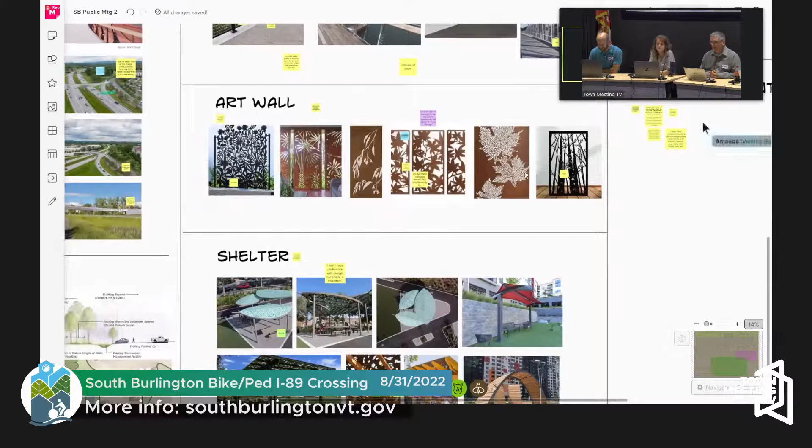Question to the artist. Some good feedback for the artist to be sure that there aren't any sharp edges that kids could stick their fingers in. I would like to think that we could find a technique to cut those out that would limit that. But I think it is a good consideration that we need to make sure kids can't put their hands in things and get them stuck.

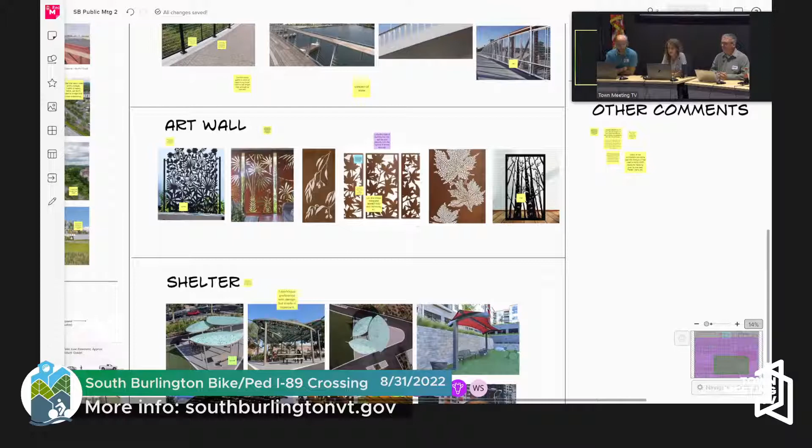You want to take back over? Yeah, presentation. We got a lot of feedback. What's that? Full. Those are a lot of Post-its. People have a lot of opinions. It's great. When are you going to report out? Are you guys still... The mural's open, so super high level, like 2 minutes. Yeah, I mean the microphone's on. Actually, would it be alright if I just sat here with my computer open and read some of the stickies, consolidate them? Is that okay? Okay. The microphone's on.